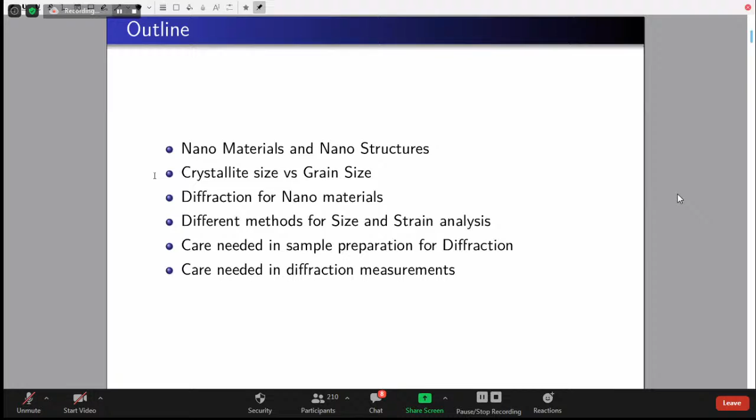So there are two things in nanomaterials. The one is anything which is less than, this is just a thumb rule. So if somebody asks me what happens to 101 nanometer, there is no answer for that. But it's like a thumb rule. You can say that anything which is less than 100 nanometers can be considered as nanomaterial. But when it comes to the nanostructures, it is purely based on the confinement.

Students who are just now studying or the faculty who have already dealt with quantum physics know that it is always dependent on the confinement. The confinement is one-dimensional, two-dimensional, and zero-dimensional. These confinements will give us thin films where we will see the size effects. One-dimensional means we will have nanowires, ribbons, and other things, and nanoparticles, which are the quantum dots.

Usually all the material scientists will be concentrating more on zero-dimensional objects, where charge carriers are confined from all three dimensions. Okay, so we are going to deal with the nanoparticles part. However, we must understand this confinement has to do only with the electrons, electrical properties and optical properties. Structure has nothing to do with that.

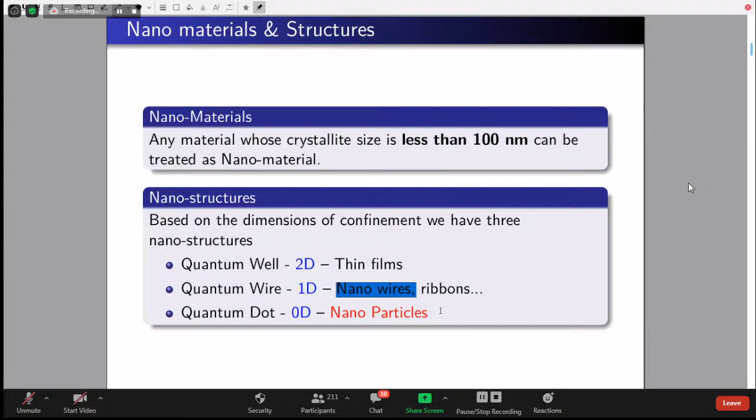They are very, very small particles where the number of lattice planes is small. That is the main concern when we talk in terms of X-ray diffraction. So this is the difference. Several students ask this question: when they do SEM, scanning electron microscopy, they see one size, and when they go for X-ray diffraction, they see a different size. Why? In the SEM, we usually see the particle sizes from the morphology of the surface.

And this is the one. This can contain several crystallites oriented in several different orientations. When X-ray measures them, it will measure only this part. So now you can figure out why from SEM we have larger particle size, and from X-ray diffraction it is very small. So in X-ray diffraction, they define them as coherently scattering domains. Crystallite size is a very loose word.

These domains can have a width, a volume, and a height. So in detailed analysis, we can get volume-averaged size and area-averaged sizes also. But if anybody does TEM, that TEM result is going to agree very well with XRD. That is the reason, when we submit papers to journals, they keep asking for TEM results. But if you do a nice analysis from X-ray diffraction, you can always avoid TEM analysis.

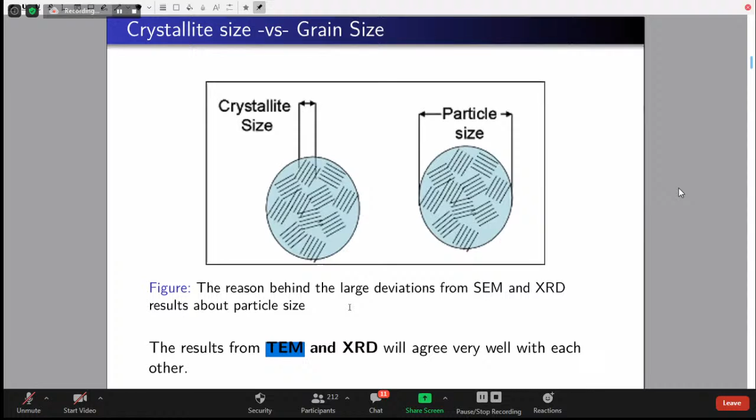Okay. So now, what kind of information is diffraction going to give us? This is a general trend. Here I am showing only 2 peaks; frankly there will be several, but for our comfort I am showing only 2. This is data recorded on a cerium oxide sample. The blue line represents the peak maximum, or peak center. The peak positions, every one of them, determine the Bravais lattice of the material.

And then the peak heights, or intensity of the peaks, tell us the positions of the atoms. This is related because of the atomic form factors. Oxygen and cerium have their own different form factors; together they give you the height. Now if I add a little bit of hafnium into the cerium oxide, this height is going to either increase or decrease depending on where the atom is sitting.

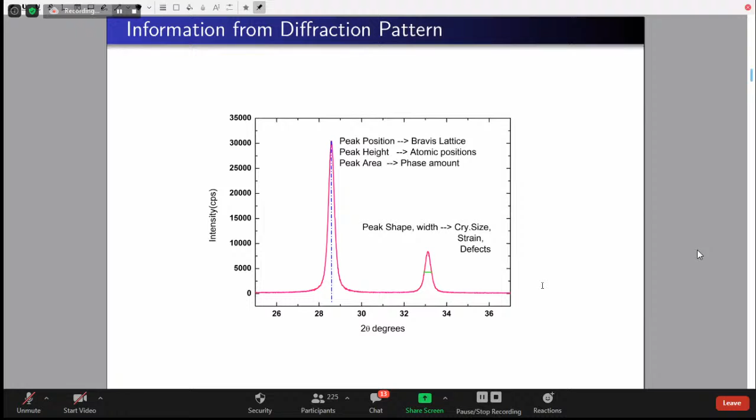And before going there, people used to ask me how many peaks are necessary to be measured. The fundamental and correct answer is we should measure as many peaks as possible, but it is not always possible. Then the thumb rule we give is number of peaks over crystallographically independent atoms. If you take nickel oxide, which is cubic, the primitive cell will have 2 atoms, nickel and oxygen. So number of peaks over number of atoms should be 10, so we should be measuring 20 peaks. That is the theoretical requirement. Only then can we say that this is the phase.

But usually for simple cubic materials, that many peaks will not be available in the measurement 2 theta range, so in those cases we can accept them. Whereas for low symmetry phases, like tetragonal, triclinic, rhombohedral, we should be able to measure a large number of peaks. It is very essential to have more peaks. With one single peak, nobody should identify the phase as cubic or hexagonal. This trouble comes with thin films. Thin film thickness is usually a few nanometers, maximum half a micron, which means 500 nanometers. Then crystallite size will be very small, and usually they will be oriented in one preferred direction, so we will see only one peak, in rare cases a second peak. In those cases, we should find another way to figure out the phase, like TEM analysis. But for powders, we should measure as many peaks as possible.

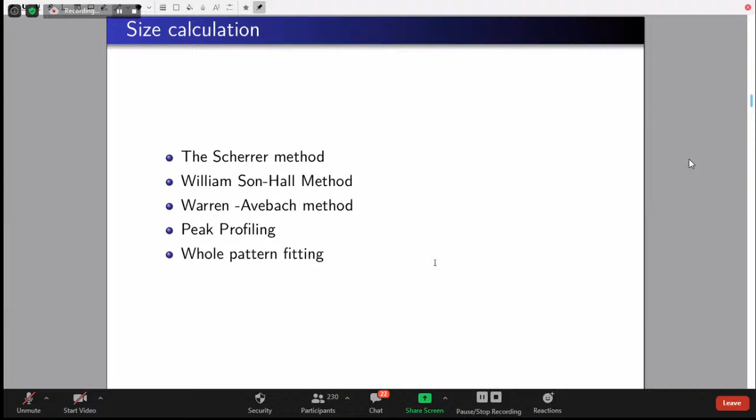Now we will go for the size calculation. The easiest method is Scherrer's method, and then the Williamson-Hall method. I am not going to deal with them in great detail, but I will show you why we need those things. And then peak profiling and whole pattern fitting are also there. I just wanted to list them for you to know; they are interesting, but each topic is another lecture. So today we will not do those, but the first three we will do briefly.

So this is the Scherrer formula, which everybody knows. Students will have this question: why is K, the Scherrer constant, given a value of 0.94? Technically it is not a constant. It varies with shape; every time we change the shape, the Scherrer constant is different. But the safest one is spherical crystallites. Why are we more interested in spherical crystallites? At least for all the physicists, it is the most interesting one.

One of my professors used to tell me that if you just give a cow to a physics professor, he can write an equation for that. How? We can assume the whole major part of the cow is spherical; the rest of the things are simple deviations from that, 4 legs, 1 tail and a head. The gross part is spherical, so we can write an equation very easily.

So the same philosophy people have adopted here. What they say is, if it is a spherical crystal, the rest of the things are small aberrations, where we can give 0.94 as a safe value for the Scherrer constant. But afterwards, people have done a lot of research on this and they have mentioned this.

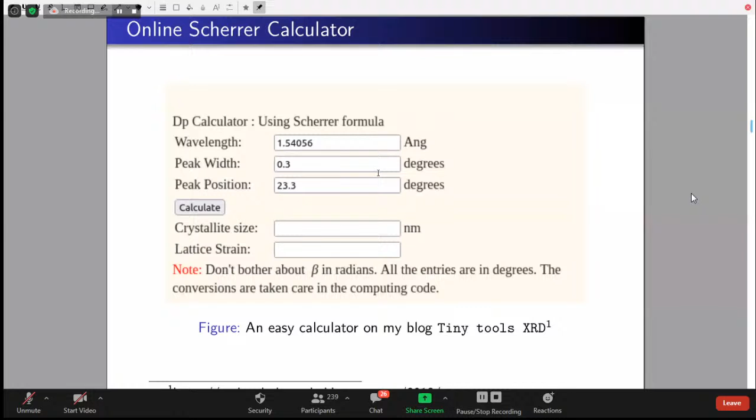So this is for people who are just playing with the crystallite size. This is a blog where you can simply give your wavelength, peak width, and the peak position. If you give those things, it will nicely calculate crystallite size and strain. It is available online freely. Anybody can use that.

The next one is a little bit sophisticated compared with Scherrer's formula. We can nicely separate out the contribution of strain and crystallite size using the Williamson-Hall method, where we plot beta cos theta against sin theta. Theta is your Bragg angle. The slope gives us the amount of strain, and the intercept is k lambda over L. k is the constant, lambda is our wavelength, L is our crystallite size. We can easily calculate and separate out.

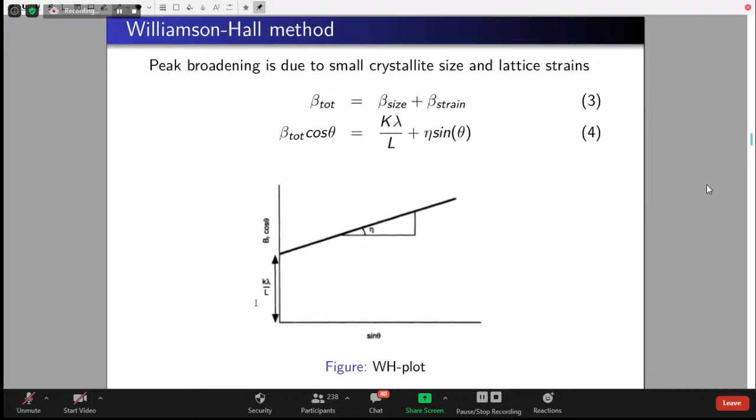Well, I will go further. This is also another. Professor, I have a doubt here. Yes, sir. Is this the only way of determining the stress associated, strain associated with the particle, or is there some other method by which you can calculate? Yeah, there are several methods, sir. However, we have to do the profile fitting only, purely. But this profile fitting has its own advantages, means pros and cons.

How this goes is, the effect of strain could be propagated throughout the sample, or this strain is alone there in one particular crystallite. Means the crystallites which are oriented in one particular direction are only experiencing it, or everywhere it is there. So it depends on which peak you have chosen to analyze this. So what people have done is, instead of getting confused with the different peaks, let us analyze everything in one single pattern. So that is something people call whole profile fitting. Okay, Professor. They use all the peaks in order to do that.

But what I explained till now, Scherrer as well as Williamson-Hall, it is peak by peak. Okay, Professor. Yeah, and here also we have several issues like alpha 1, alpha 2. Students never bother that there is an alpha 2. If they see a broad peak, they will fit that with one single Gaussian, and they say that this is that broad, but they have to see there is an alpha 2 contribution in the X-ray diffraction. When we do it, first we have to strip out the alpha 2, then we will have the real widths. So these are the care we need to take.

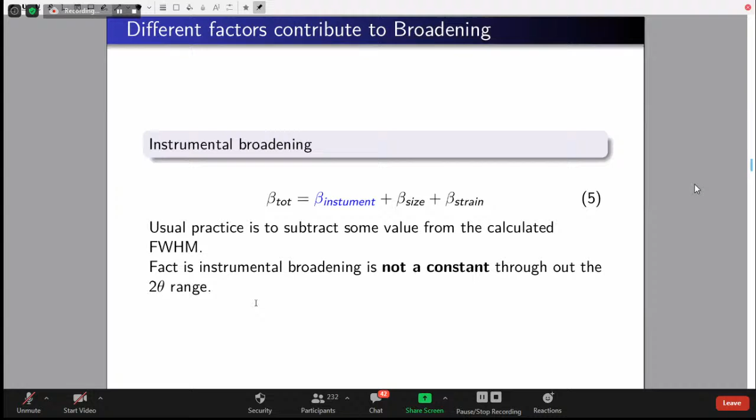Based on this fact, if somebody is using the Scherrer formula, you should be using the peak which is at lower values, not at the higher values. If you are using a peak which is at higher 2 theta, then we are introducing broadening which is coming from the instrument, not from the sample itself. The instrumental broadening will be small at lower 2 theta. So only those peaks you can consider for analysis when you are calculating the size or strain.

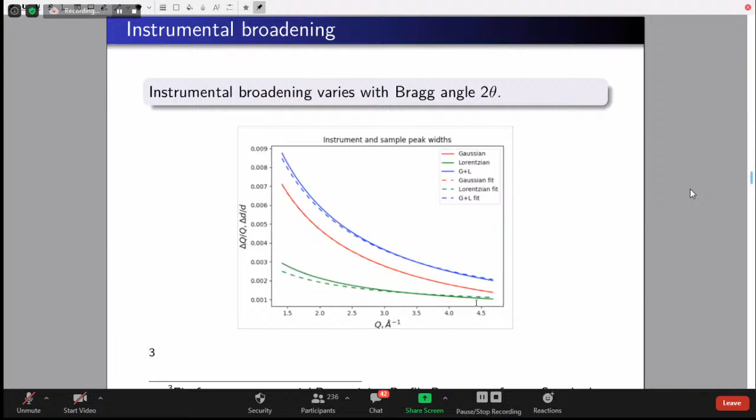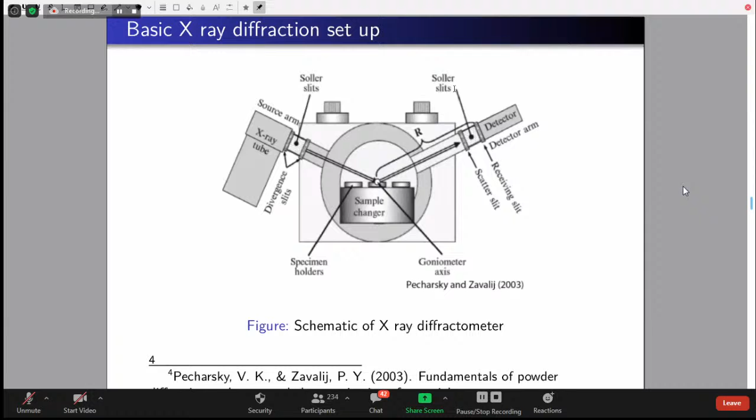Whoever has worked will see all that become one single peak, and people think it is because of small crystallite size. I have a nanocrystalline zinc oxide, but it is not true. It is because the diffractionist measuring it has used a large receiving slit on the detector side. So how do we control this? We can control this by giving our own set of instructions for the diffractionist, what we need. Otherwise we will have serious trouble interpreting our data.

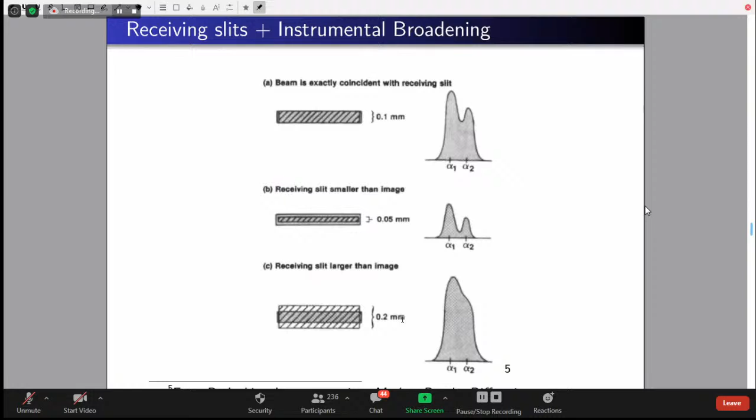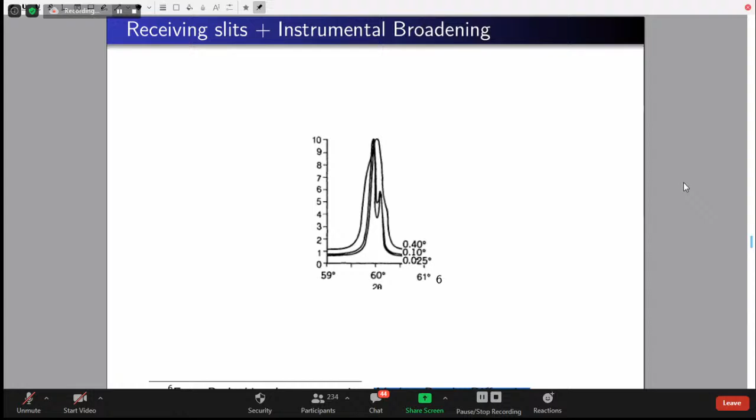This is nothing new, all these things are already there. You can see this is a book, Modern Powder Diffraction, written by Jenkins. You can find all this information there.

So the other one is divergence slits. You are very much aware of these things. You might have seen when we give the powder sample, what a diffractionist will do is pour it onto a glass plate and load it onto the diffractometer. But when he is pouring it onto the glass plate, how big does he make that? So it depends on what is the footprint of the X-ray.

In that case, first thing is we will lose the intensity. Second, we will get diffraction peaks from the sample holder. Usually it is a glass plate, in some other places it will be an aluminum plate. So when a new peak is coming, people think the next phase is coming, but we have to first rule out that the peak is not coming from the sample holder. This is the problem of using the wrong size of divergence slits.

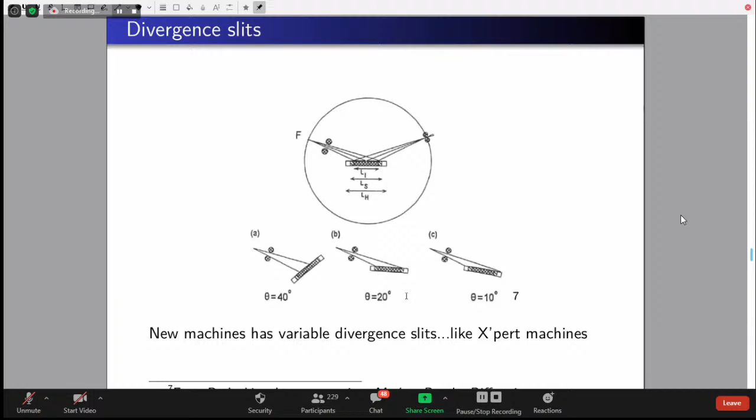Right. So apart from size and instrument, we will have the other part, which is coming from the strain, and strain can be simple strains which we could see as tensile or compressive strains. These strains are going to simply shift the peaks.

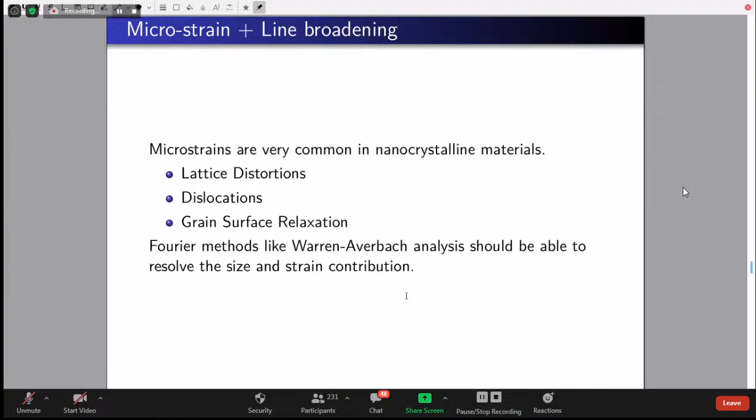Whereas the lattice distortions - let us suppose we lost one atom, then the lattice is distorted, or we have an extra atom coming, then lattice is distorted. When I say lattice distortion, it means your D-spacing has increased or decreased. So these ones are going to give us peak broadening as well as peak shifting. So these two things we have to see together.

So how we can formulate them is we have to bifurcate. Williamson-Hall method will not be able to do this, but we have to do

the Warren-Averbach method, which is based on Fourier analysis, which can separate out the contribution from the strain, contribution from the crystallite sizes, and when it is separating out the strain values, it will show you how much is coming from the dislocations, how much is coming from the faults.

But this distinction only the experimentalist knows, who knows the history of the sample. If I have a sample with more number of dislocations, I should attribute this effect to the dislocations. But if it is more of faults, then I will attribute to the fault. So there is no straightforward definition for what is contributing to what.

But this can be done with the Warren-Averbach method, where you could see the surface domain size - here in the y-axis we have the frequency, which means how many are there. Then you can ask, what do you mean by how many are there?

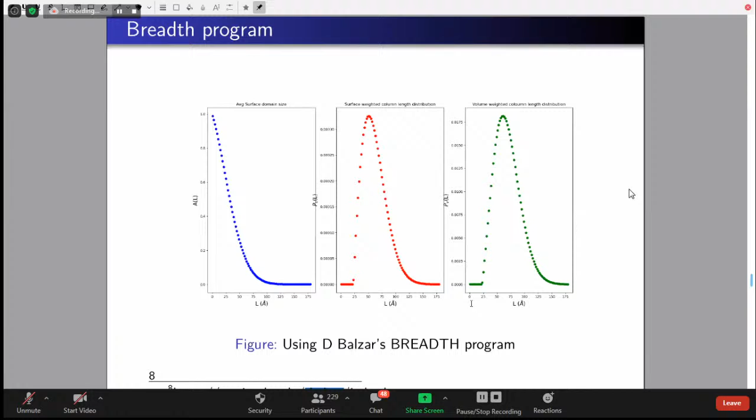If this is the site where you can see, this name is Davor Balzar. He has created this program where you can conveniently calculate these distributions. These distributions will match the results from TEM. You can see that part too.

Amma, any question, Amma?

Fine. Right, sir. So there are other methods, other errors, which I just want to cover, and with these errors I think I could finish this. First thing is the flat specimen error.

This one, I think by now you can understand. I have already given you the example of when we put the glass plate over the top, if we put the powder. So when we put this powder, how thick it should be.

Usually I used to see people send tiny vials where it is not even enough for sniffing what powder it is. That kind of tiny amount they will send it for X-ray diffraction. That amount is never ever suitable, and whatever results we get from that are not suitable enough. We should send a minimum of 1 gram of sample, and the sample holder should be filled with this powder tightly.

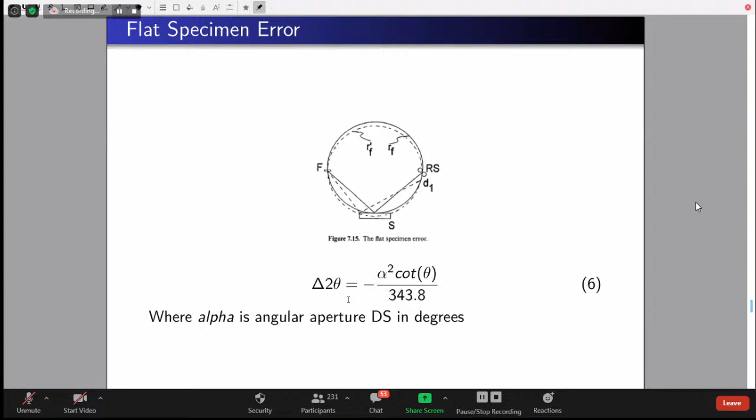The other one is specimen displacement. This problem occurs only with diffractometers where the sample moves along with the detector. If the sample is fixed at one position, as in theta-to-theta measurement, you don't have this displacement problem. But when it is moving, usually the glass plate, if not fixed properly, will slightly tilt, and every tilt will move your peaks either left or right. We start interpreting this as strain in our samples, but actually there is no strain. This has to be checked again and again to avoid wrong interpretation.

A student asks: in the previous calculation, what do you mean by capital R, sir? This is the radius of the goniometer. It is a constant, determined by engineering design. It is the distance between the source and the sample, and it should be the same as the distance from the sample to the receiving slit. That is R.

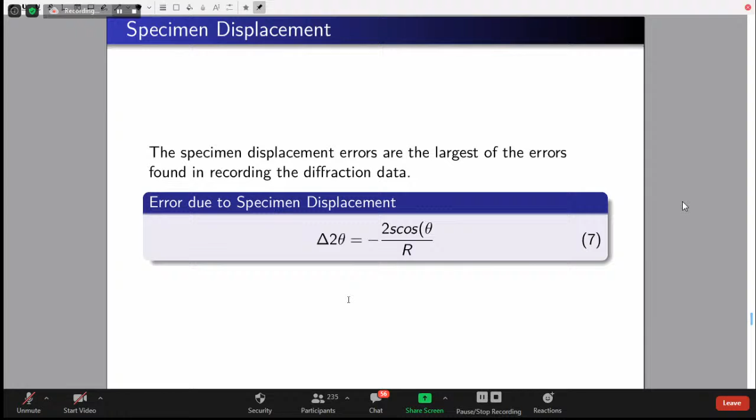But this sample displacement is an adjustable parameter in the analysis. When we go for full profile fitting, we adjust this. We can calculate and shift the entire pattern in one direction, not just one peak but the entire pattern can be shifted. This can be done.

And sir, if we increase the radius, what will be the effect on the specimen? Going back to the same optical grating experiment: if you increase the sample-to-screen distance, the spots will move further apart. Then all your peaks will be spread out over the 2theta range.

Yes, sir. Then this is not because of the sample. This is because you have changed the R. Yes, sir. Okay. Now the question comes about what is the step size?

The step size: usually people ask how long I have to measure or how many steps I have to measure, whether it is a step scan or continuous scan. The difference between step scan and continuous scan is pretty simple. It is the electronics behind the diffractometer. Otherwise, both are just step scans only. In the continuous scan, you don't have control over where you are collecting the intensity. It will just collect randomly throughout the range, and it will put the points according to the software you gave.

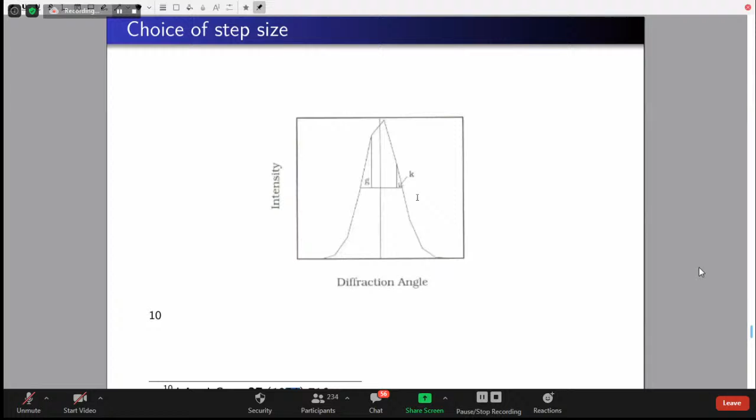I can show you here. See here, this is flat, meaning we don't know whether this is the maximum or this is the maximum. This is the worst way of measuring it. The B case is the best way, and C and D are okay. We are taking a risk of a little uncertainty, but in the B case, it is correct. So the step size should be such that the peak top has more points to define this curvature, and fewer points in the inflection. That is not a problem. But again, near the tails, there should be a large number of points.

So then it appears that the step size is not going to be constant. In automated diffractometers, there is a variable step given for us. We can measure accordingly, or otherwise anybody can measure one peak like this. It won't go beyond 5 degrees. So you can measure this and find the number of steps properly, which gives you this kind of sharp peak, and use the same step for the entire diffraction.

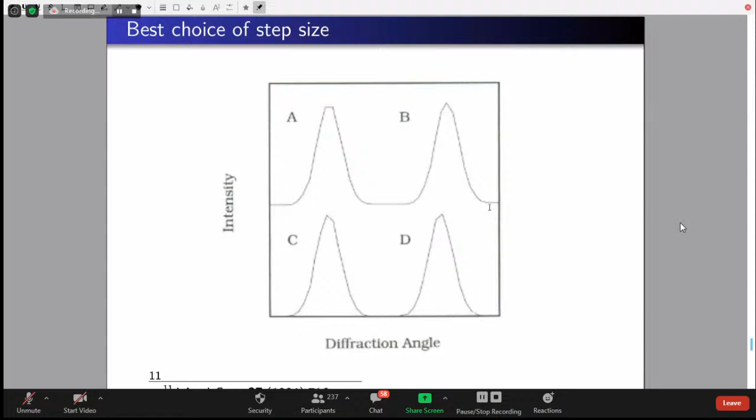Right. When we prepare these samples, how should we prepare them? For that, there was a good amount of explanation. Here I will put it briefly. When we are making this powder, before going to the diffraction, we should always grind it and use some kind of sieve in order to get a very smooth powder. What kind of smooth? The smoothness should be like the talcum powder we apply on our faces. There should not be any granular particles.

Why are we seeing this kind of loss in intensity? Because powder diffraction is entirely based on randomness in the orientation of the crystallites. When the crystallite size is big, the randomness will not be available. All of them will sit in one particular direction, and whether we are measuring in that direction or not, we don't know. So all the rest of the peaks will have small intensities. We think the material is not crystalline, but in fact it is not ground well. So we should use a mortar and pestle and make it a very fine powder before giving it to the diffraction.

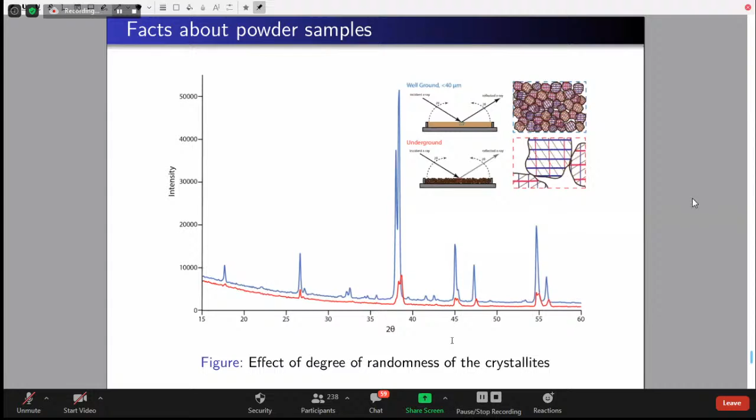Right. The other kind of problem is preferred orientation. This is a major problem in thin films, but in the powder case, it should not be. As you can see here, this is very randomly oriented. There is no preferred orientation in this sample, so we will have nice peaks, which we got.

But here you can see the crystallites are not ground well, number one. Number two, they are all arranged in one particular fashion. Then they will give the peaks in a completely different way. And if you turn this sample another 90 degrees, you will get another peak more intense. So every time people load it, you will get different results. That is because it has a preferred orientation.

Some samples grow preferably in one particular direction. For them, nothing can be done. But usually for powders, you should grind it properly and measure it. If you have a doubt about preferred orientation, my suggestion is, as I told you, turn the sample 90 degrees in one more direction and measure it again. Then if there is an intensity change, you will know that your sample has preferred orientation.

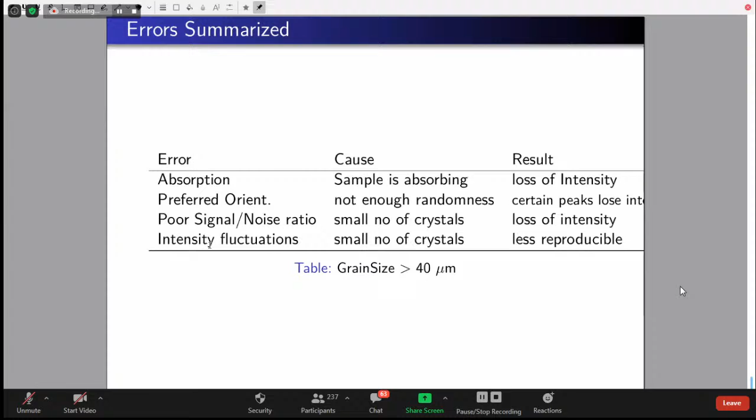Preferred orientation is when you don't have enough randomness, meaning you did not grind it properly, so certain peaks will lose their intensity. If you give a very small amount of powder to the diffractionist, then we will have a small number of crystals. Again, you will lose the intensity. All these intensity fluctuations will never be reproducible, so your interpretation is completely ambiguous. You don't have any control over your interpretation.

The next one is if you overgrind it. Below 1 micron, if you overgrind it, all the peaks will broaden, certain amorphous content will come in, and contamination will come into the picture. This contamination will not come if you are using a mortar and pestle, but in some labs, people use a tiny ball mill where they overdo the milling. Then a certain amount of the material of the balls used for milling will come into our sample, and we will have contamination.

The other one is amorphization, which is not actually in our sample, but when we grind it more and more, we make it amorphous. It will lose its three-dimensional ordering. The long range ordering will be absent, and it becomes amorphous. All these are made by the user and are not actually in the sample. So we should take all this care before we go for the diffraction experiment.

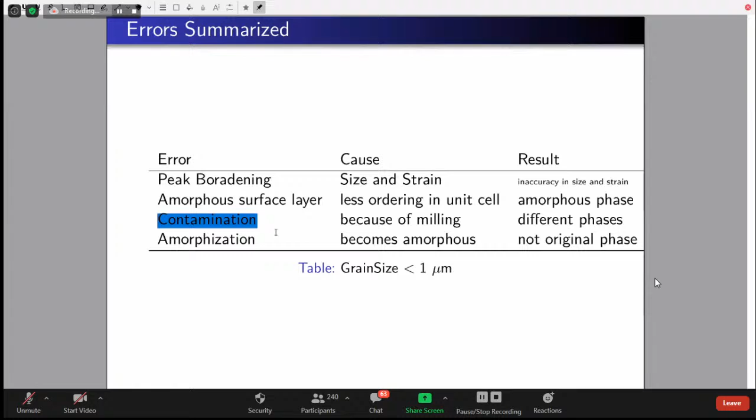I believe with this I will stop boring you. Now you can ask questions from anywhere to anywhere.

Sir, slide number 28, sir. Here you told we can rotate 90 degrees. Suppose we are getting different peaks for different rotations, then how should we consider which one is correct? It is having preferred orientation, sir.

Your sample is oriented. You see, in the cartoon I have shown, these are ground particles, which are almost spherical. Whereas here, these particles are grown like bananas. They are elongated ellipsoids, which could be because your material grows like that. That is a material property, which we can't change. But otherwise, when we do solid state reactions and other things, they have grown like this. So this is the shape property.

If you grind them a little more and the preferred orientation goes away, that is fine, no problem. But if even after grinding they grow in only one direction, that is a property of your material, so you have to interpret the growth in one particular direction. Now people are growing cabbages, flowers, these kinds of things. Why it grows, what kinetics make zinc oxide grow like a flower or a lotus, has to be explained. For them, every peak will have different intensities.

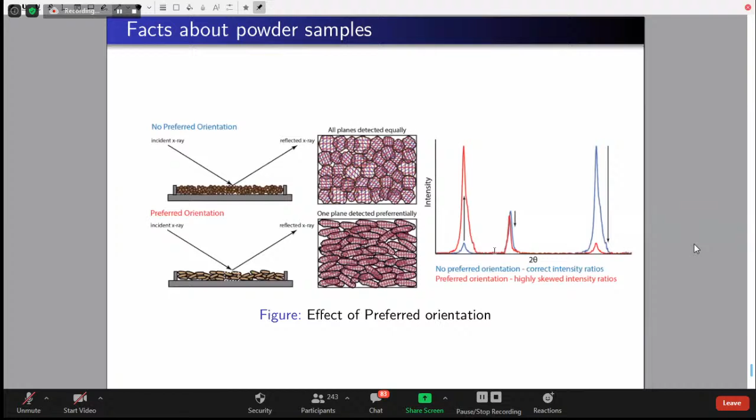Professor, I have one more question. Please, sir. For the Scherrer formula, you told us the K value is 0.94 for spherical. So what about for different shapes? What value should we fix for K? That's what I mentioned. The safest way is using 0.94 as the Scherrer constant, because that is suitable for spherical crystals. But there is a huge debate about how the shape is going to change the Scherrer constant. That is a very tedious job to do, sir.

Or else, if you don't like this 0.94, you can just use 1. Mostly that is a heavy approximation; it's not going to change life much. But when we are using tetragonal, triclinic, or monoclinic, the very low symmetry ones, it is better not to use the Scherrer formula for crystallite size. It very much overestimates the crystallite size. Then you will be disappointed.

Better you go for the Williamson-Hall plot, where monoclinic is going to give you a large number of peaks, and if you put all of them in one, you will get a better average crystallite size rather than from Scherrer's formula. The Scherrer formula is more suitable for materials with cubic symmetry, like simple cubic, FCC, BCC. That much only we can go. Okay, sir.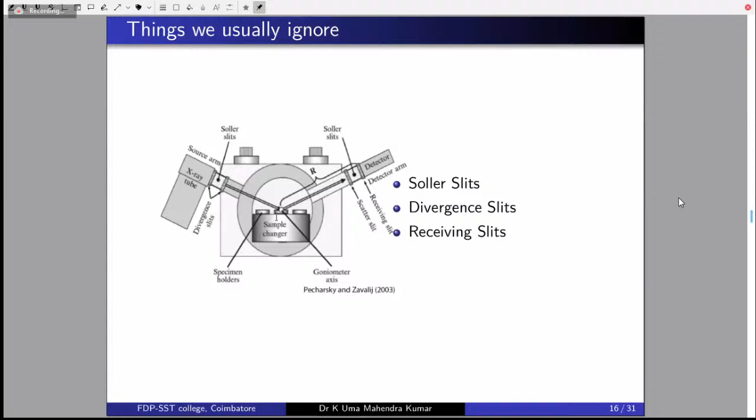But the detector is here. So if it is traveling like this without diffraction, then this is theta. And if we have a normal over here, that is another theta. Together we will be measuring 2 theta. So the detector will always be running double the theta. That's why it is 2 theta on the x-axis.

One more question. Can we plot a Williamson-Hall plot for nano-composite materials? Yes, we can plot. There is no issue with that. But the limitation of the Williamson-Hall plot is you have to use the same family of peaks. If you can choose that, we can always plot. So these are some of the questions which I saw in the chat box.